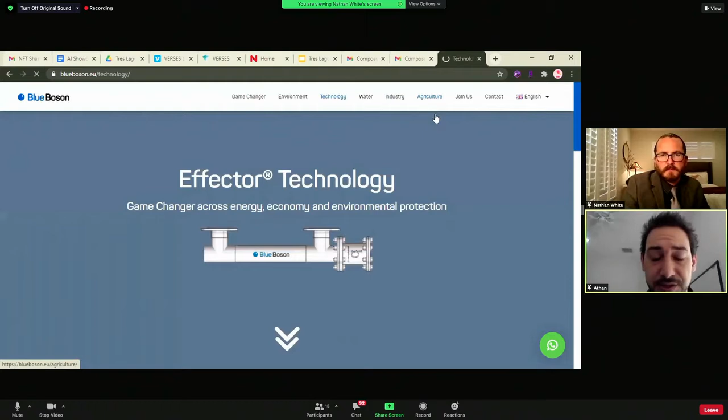In doing so, we're able to eliminate much of the typical infrastructure and cost. We're also able to scale this and implement it in decentralized areas, from indigenous communities to places that need help restoring riverways or treating areas, using a lot less energy to apply these methodologies.

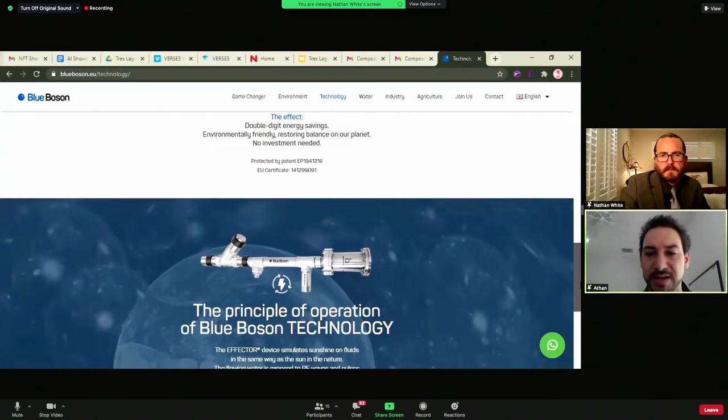Our excitement with this is that through our studies, we're able to change the evaporation temperature or the heat temperature that normally responds in a certain process. This also has implications for affecting the latent heat evaporation of water, potentially increasing rainfall in areas that need it.

We can reduce the thermal requirements typically required in a lot of water processes, and actually inhibit scaling, which is usually a problem today in desalination processes and similar applications. We can also reduce power requirements to achieve targeted results. It's exciting to be able to share these technologies and showcase things that are impactful for the environment.

We have part of our roundtable discussion that's been happening, with you, myself, your partners, Dr. Andrea Neal, who's on the call here too, and Rob Simpson. We've been going over some of this information, and maybe we can bring that up.

Rob, from your experience looking over this information, we're really excited about the scalability aspects—from a unit, shipping container size, all the way up to a massive field or array of units, or a manufacturing area. That's a really interesting part of this.

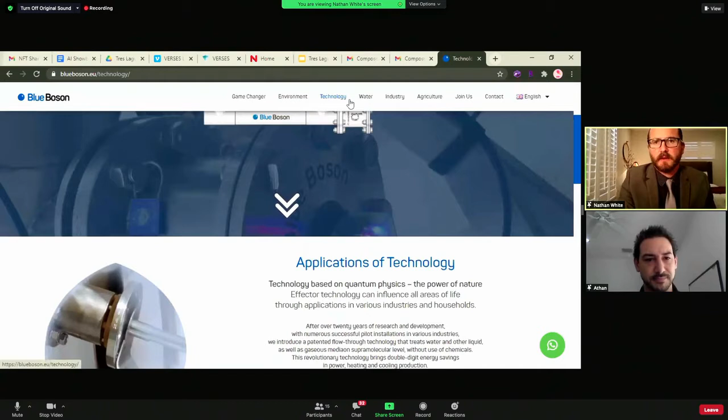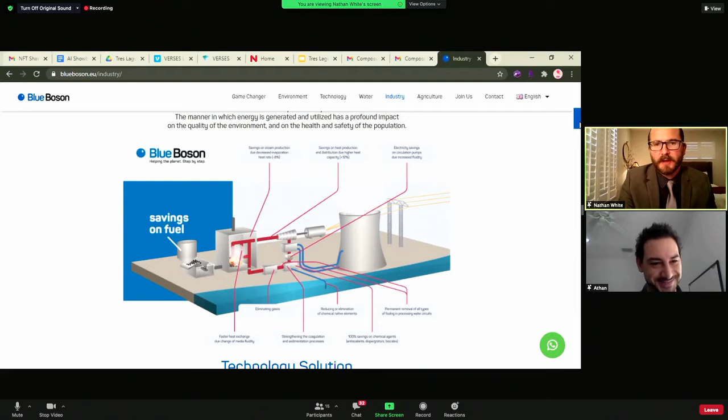That's really interesting. If you'd like, I could share my screen and go through one of our presentations, because of what you mentioned—we do quite a few different things with power plants and stuff like that. Sure, go ahead and do that.

Let me open this up. We're still having a little bit of trouble with the audio, so if you want to try and call in on your cell for the audio, that might be the best case. Okay, let me try that.

While he's working on that, do you mind if I reflect a little bit on my understanding of the technology? Absolutely, yeah, that's the open forum that we're here for.

Everyone here is familiar with a human being going within an magnetic resonance chamber in order to get imagery of the human body. Well, think about making that chamber a little smaller in diameter, and now you're running water through it. What this process, I believe, is thought to do is actually change the molecular structure of the water molecule.

So, hear me or not hear me? Some yes, some no, okay interesting. So what I can try to do is pull up my share screen here, let's see if this works. And pull up this one here. Whatever you're doing right now, we're getting the best audio of the session. Great, well that's wonderful then. So maybe it's just identified me as a person and it's allowing me to send it up. So let's see here, if I can open this up all the way. View full screen mode. All right, let's see.

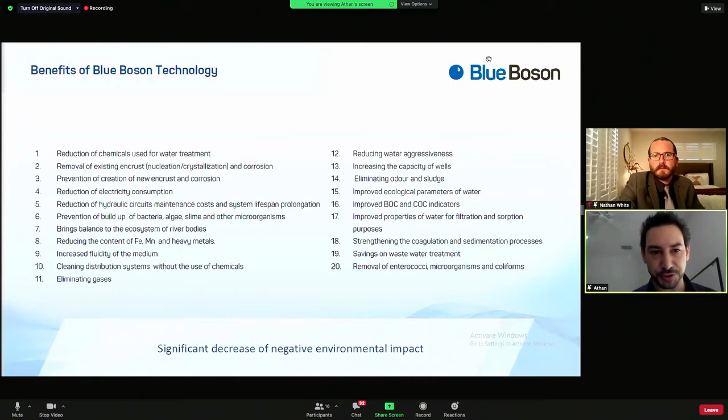Okay, so what we focus on is pretty much the ability to, I'm going to go through these a little faster here. We use resonant frequency, and we use low band frequencies, low energy applied to water. So when we're talking about how much water can be treated, it's usually depending on the size and the flow rate of the pipe, and not applied based on the amount of energy our technology needs.

Water has some very interesting characteristics where it's able to communicate through the crystalline structure. Water is a crystalline lattice matrix. It's capable of carrying, transceiving, receiving and storing weak information. But if you're able to change its structure, you're able to change the dynamics of how it transports materials within and is able to communicate. So this has to do with heat capacity, surface tension, evaporation, and the density of water.

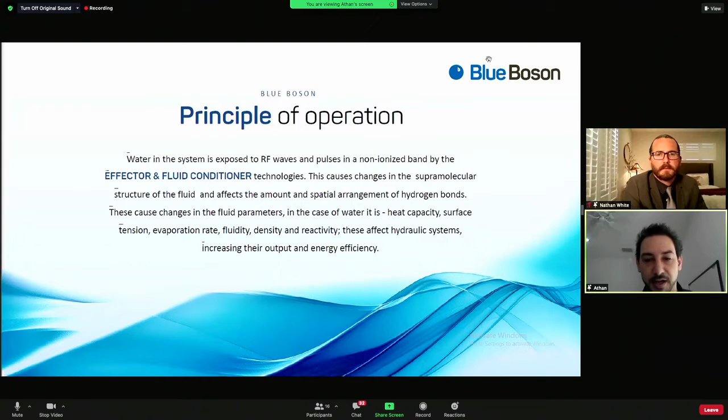We're able to precipitate and disseminate the elements a lot faster than you would in normal processes. This relates directly to filtering elements before they would go to membrane systems. So we're working with a couple groups right now within these processes to get the best efficiencies for membranes and for desalination, so we can systemize these together for this particular project.

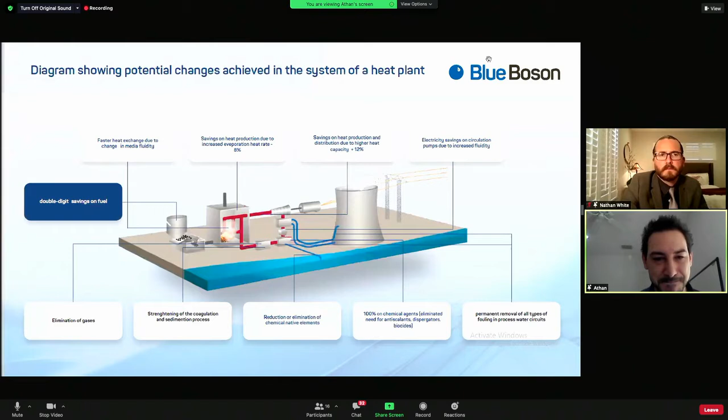I only hear myself, so I don't know if you guys can all still hear me or not. Hello? Yeah, we can hear you. Okay, perfect. Can you go back two slides? Yes, right there—evaporative heat.

That's latent heat of water. I believe you're looking at fresh water at 20 degrees Celsius. Normal evaporative or latent heat would be somewhere around 2,200 kilojoules per kilogram, and you're looking at 1,925 plus 11. Can you provide any further information?

I think it's also relative to the particular water on site and the environment, but with this particular study, that's the differences that they were able to get.

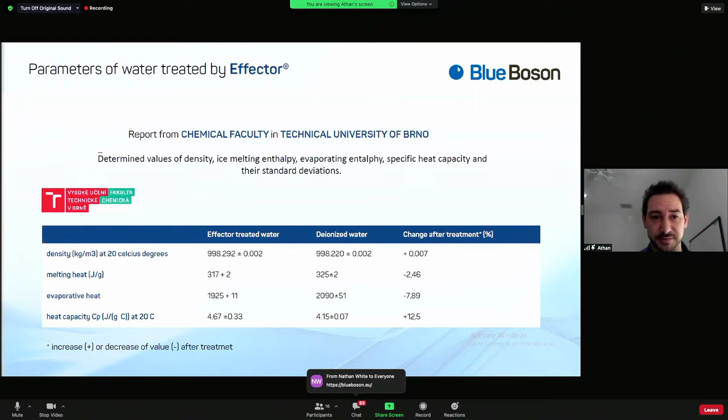I think there's a lot more that we have to realize with water—it's a lot less also just not only energy, but the dynamics of structure. Some things can't fully be measured, but there's also things you can measure and see as absolute results. For example, when we're producing ice or separating elements, you'll be able to see that in a practical sense, and that usually supersedes often what we're showing in some of these systems. Thank you.

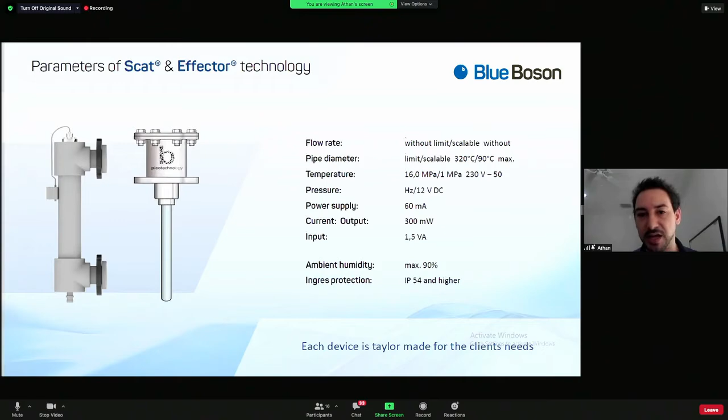So here's an example of the Scat and Effector. These are systems that we can employ directly into the water mains. What we're able to do, in effect—and you'll see the power supply—is it's not a system that takes a lot of energy. Same with some of these technologies I'm showing you here below.

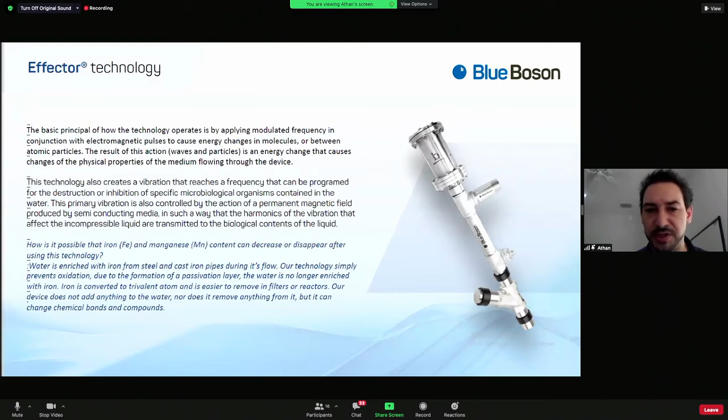These are systems that treat water directly in line in pipes, so we don't need chemicals. This creates an effect where you're changing the structure of water, but you're able to modify these structures to be more effective, not only through the processes, but to kill pathogens, to remove algae, and destabilize those molecules before they would conglomerate inside your water lines.

And that's a big issue, because long term, when you install infrastructure, the amount of power it takes to push water through a pipe all depends on if that pipe still has the same diameter it did three or four years ago. Otherwise, you have more and more resistance or damage to pumps, things like that.

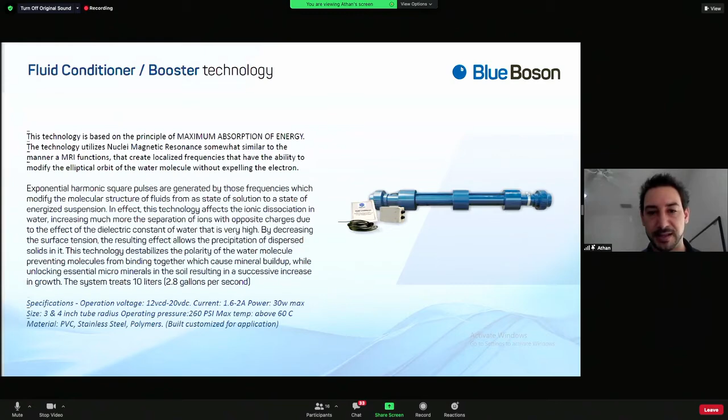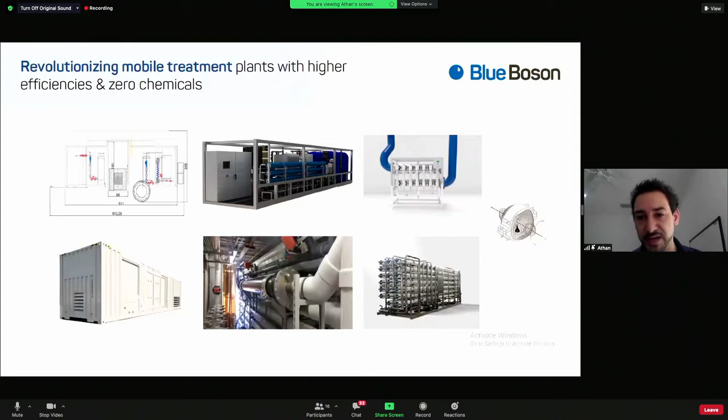So with these systems, we're able to put them together as containerized systems. We can deploy them along riverways. Some of these systems we're using directly with buildings.

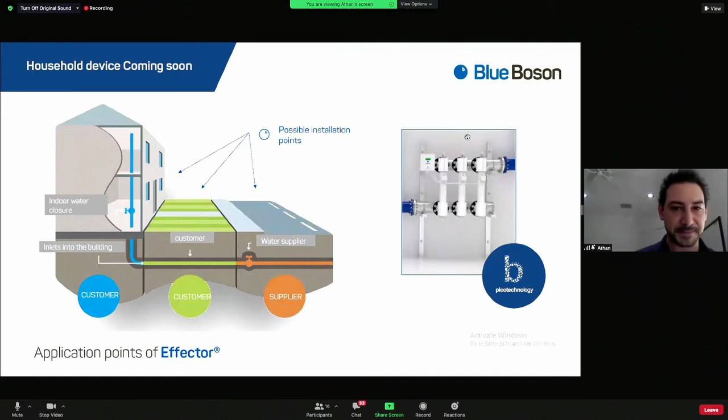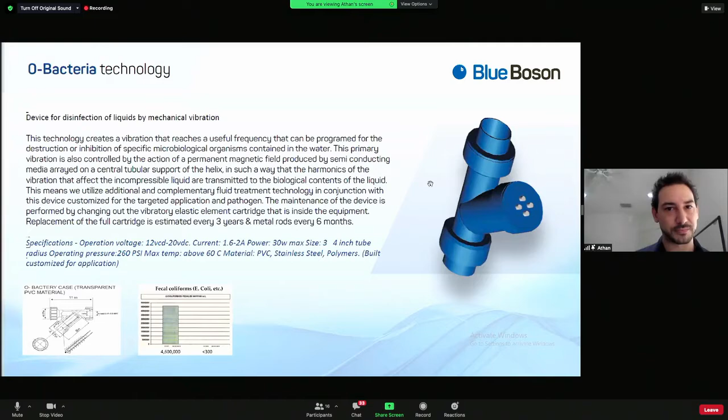Apologize here, I don't know how to turn this off. How do I get out of this? Okay. Let me see, I don't know if you guys here see me—I'm trying to get back to my main screen. Yep, you're good. I don't know if anyone has any questions so far.

No, I like what you have on the screen right here, a non-chemical disinfectant. That's our current water treatment system. It'd be great if, in Flint or some of these other places, you were able to install your systems right away, because the chemical approach is kind of our direct approach in most municipalities. It'd be great to install these at scale in a more structured scenario, starting at the federal government. I'm sure you already have many of these installed here in the United States—maybe you can talk about that a little bit.

Yes, we're doing more of mobile plants that are deployable. So I'm working with companies as well as some other commercial agricultural companies. Primarily, we have projects in Mexico and in Europe.

What's interesting about this technology is it's pass through—you can continuously flow water over these channels or through these areas, and the dynamics of what the technology provides is the way it eliminates the biological content that would be there. We can use frequency and inductance to treat anything from nanometers in size up to millimeters in size—it only depends on the bandwidth and the frequency that we apply.

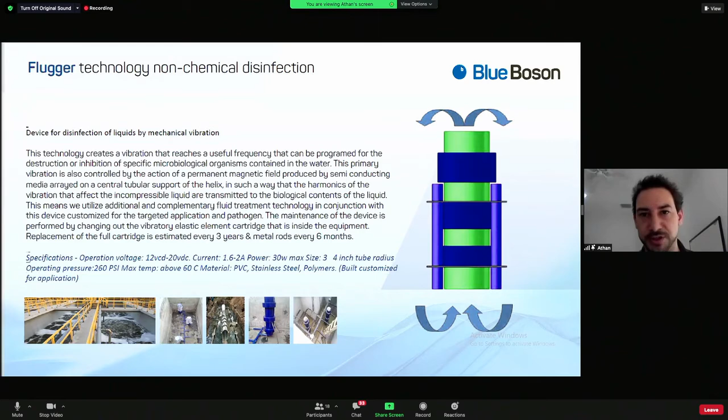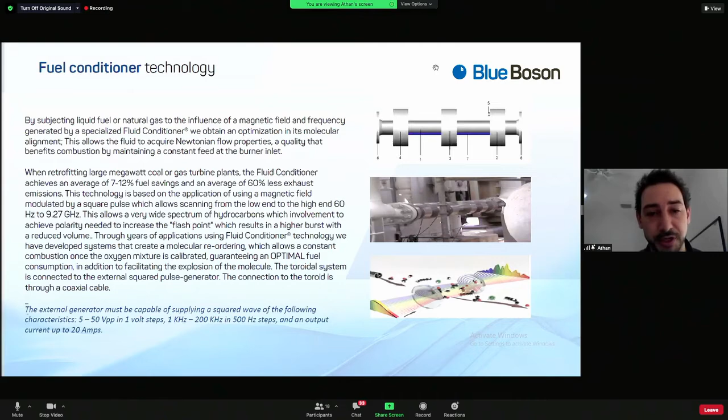The applications have also been used in hydrogen, where we use resonance and frequency to actually break some bonds of water. In doing so, we're able to produce almost 50% more energy efficiency and savings to produce hydrogen through that destabilization.

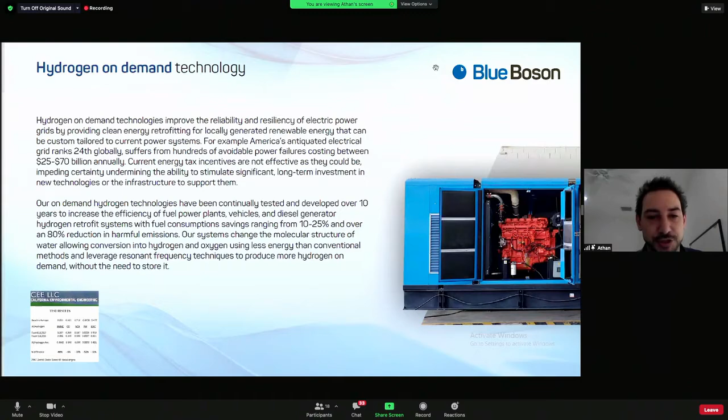This also relates to mining technology. We're able to separate certain elements a lot better. For example, we can pull out more iron, or we can pull out certain calcium and other elements like that.

Let's see, raise your hand thing here. Okay. So how we'll do this.

Let me step in real quick, Athan. We have Dan here. Dan, hopefully it's okay if we continue for a few more minutes. I want to try and give everybody a little bit of extra time, since we had a little bit of technical difficulty with the sound. Is that okay with you, Dan, if we push back by a few minutes? No, please continue. Oh, thank you.

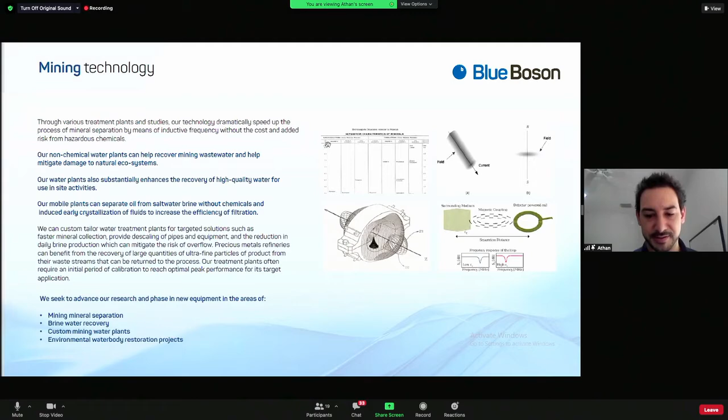Let's see here. Okay, so we've been applying these in quite a few different ways over the years. We're modularizing them. The benefits of what we're using and what we apply is lower costs.

Operating costs are less, and we can automate a lot of the processes. We're using about 70 to 80% less of the physical area, depending on the size of the plant, but we're using a lot less of the normal physical area space that would be required for water plants, container reservoirs, and so forth.

With this, we have a lot less maintenance required. You don't have the chemical components that create dangers in the work environment and in the environment. We're killing all the pathogens without hazardous chemicals such as chlorine. I think these are huge benefits and a big game changer for the industry, because we're able to speed up the processes while eliminating the chemicals.

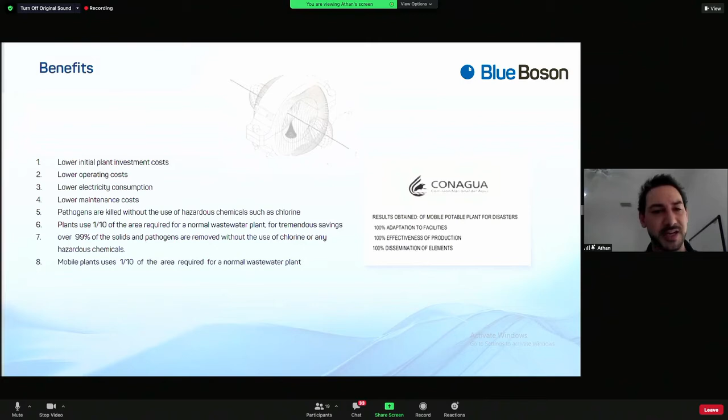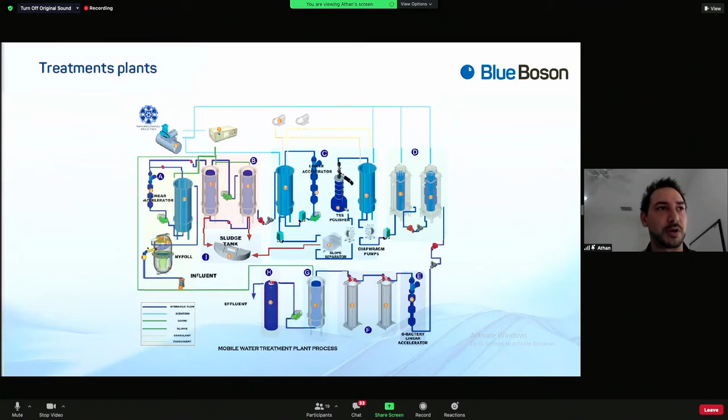Here are some examples of the systems within these wastewater plant processes that we use. We'll use inductance and frequency, and we modify the initial structure as it goes through different temperatures and processes. We're able to target the result and at the end have anything from slaughterhouse water to raw sewage, and bring it down to something that can be reprocessed or used for plants and crops and so forth.

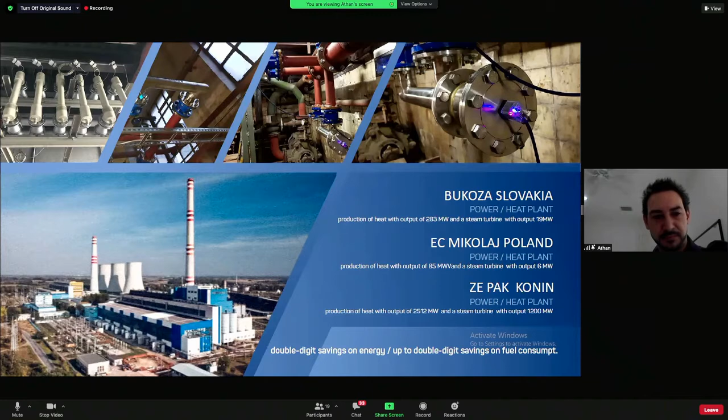Let me jump in on that, because those are some of the direct site-specific conditions. We want to talk about technology as a whole, but site specificity is really important too, not only in Mexicali, but there's a cow farm on the east shore of the Salton Sea. This could be a system that could be deployed, and it could be part of the New River and Alamo River too.

Yeah, absolutely, let me see if I can show this. Here's a good example of what we're doing. This is just water, there's been no chemicals applied. If you look at the heat exchangers in these pictures, you'll see that one's absolutely clean, like it's brand new, and that's not something you typically get with chemical-based technology.

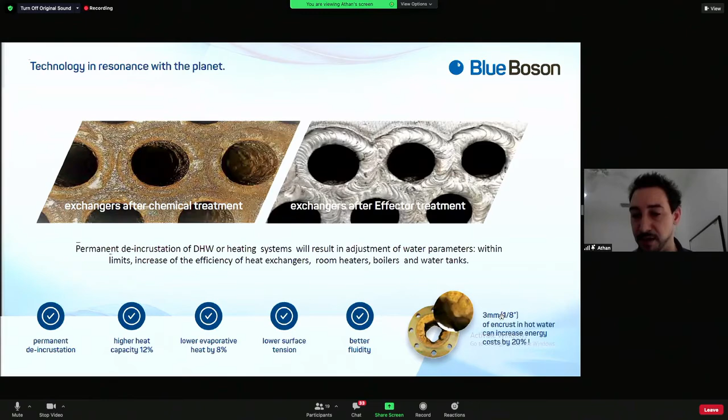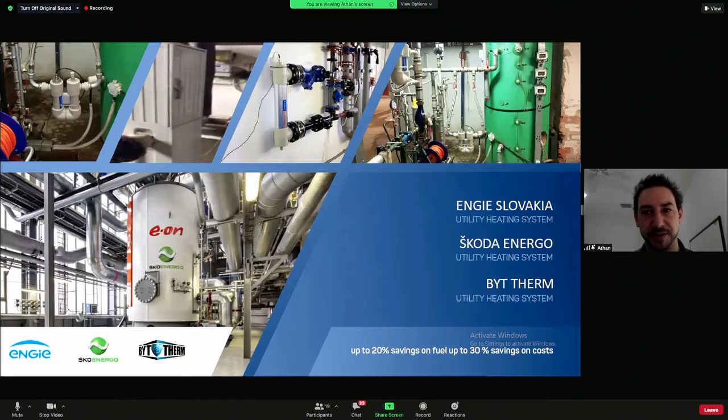At the bottom, you see the difference with the encrustments, and this would be one of the biggest concerns we'd have, because in the Salton Sea there's a lot of buildup, a lot of magnesium, and different compounds that are sticky inside of pipes. Here are a couple of our different installations we've done through the years, and the benefits that these customers and different communities have been able to see.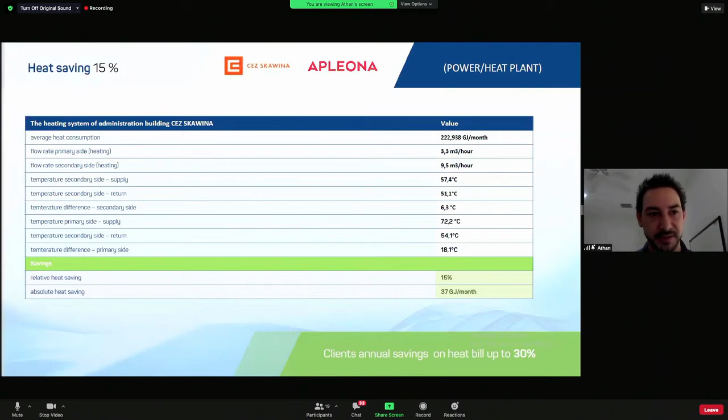Athan, this is Roger Arnold. Can you hear me? Yeah. Yes, I can hear you fine.

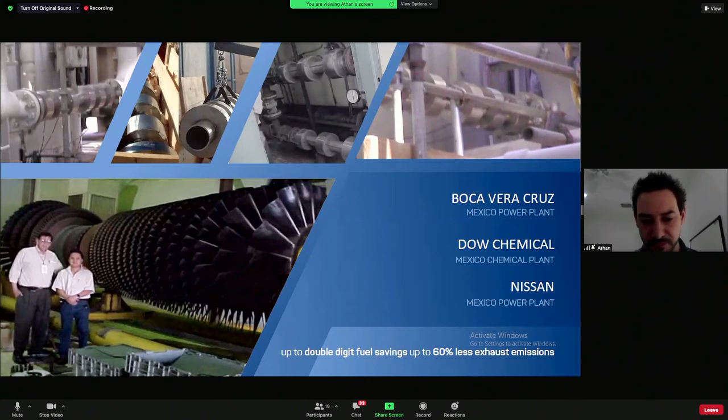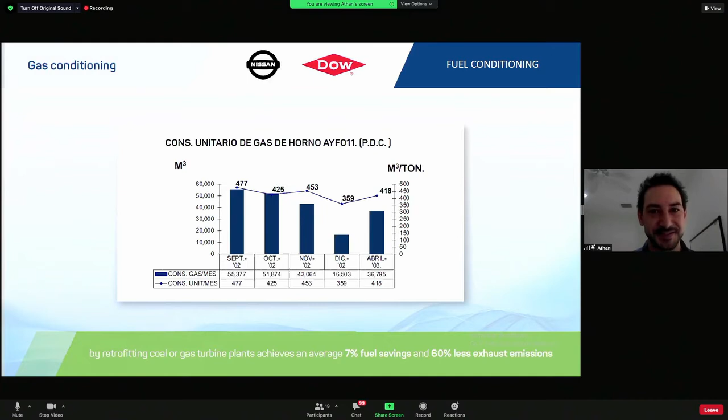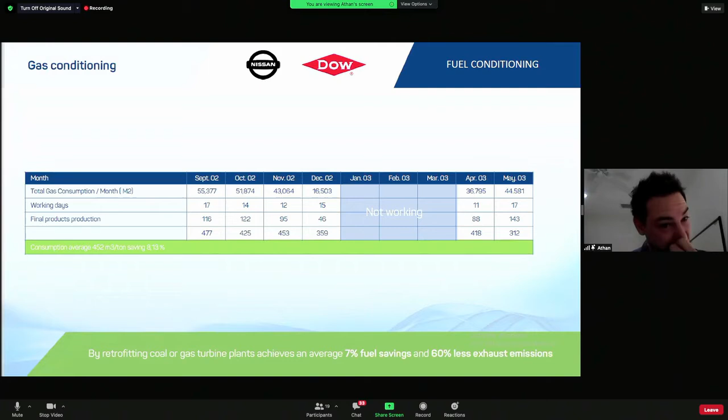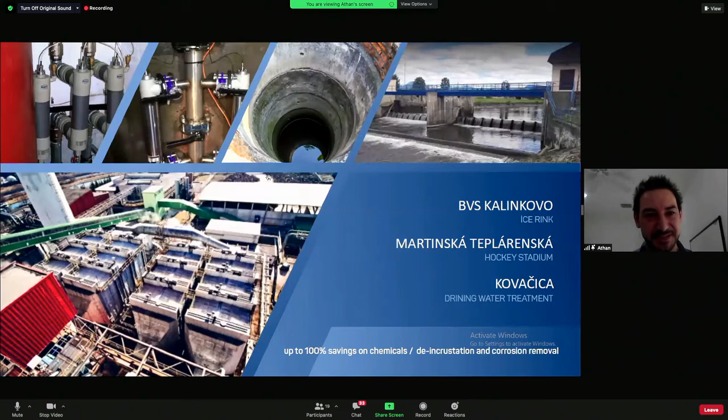I'm sure you're well aware - well, let me say I've been retired for some years, but I do have background in physics and chemistry. What you're talking about, as I'm sure you're aware, flies very much in the face of conventional physics and chemistry. I'm wondering if this is something that was developed from some theoretical understanding or basis, or whether it was something that was discovered, and if there are technical papers that expound on the theory of how all this could be possible.

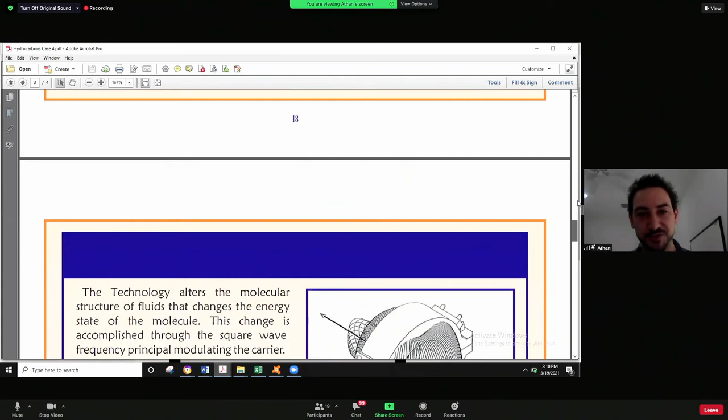Yeah, very great question. Thank you. I appreciate that. Let me see if I can't - I'm going to go to one more page, and this one will be helpful. This was the original ones, and I'm going to move up to who started this.

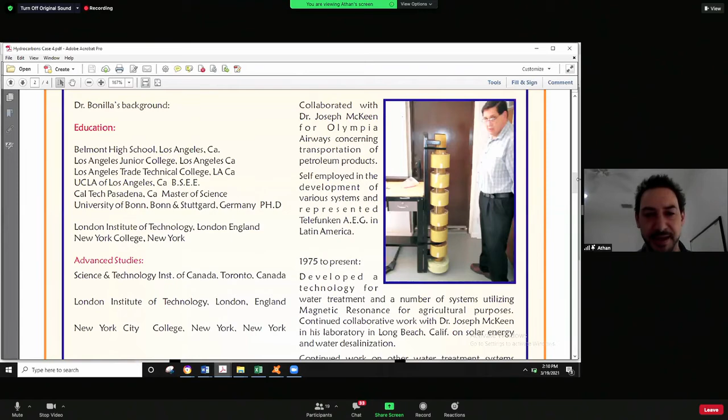And this is Dr. Bonilla. He passed away in late 2016. He was a mentor of mine and just a great, amazing person. He studied at University of Stuttgart and in LA, and he was an Air Force pilot.

Let me see if I can zoom out a little bit here so you can get a view, because this is kind of one of the original inventors of where all this started. And he's a nuclear physicist who spent the majority of his life from the Air Force to developing HAARP and NORAD programs. He worked in Antarctica.

He worked with some people that worked with part of the Bell Project, as well as under the wing of some ex-Germans who moved to Mexico City when he was a boy, that told him that he needed to start learning frequency, electromagnetism, and what energy might be. And it put him on a pursuit throughout his life to, through radio and through frequency, understand a lot of the inner workings of nature.

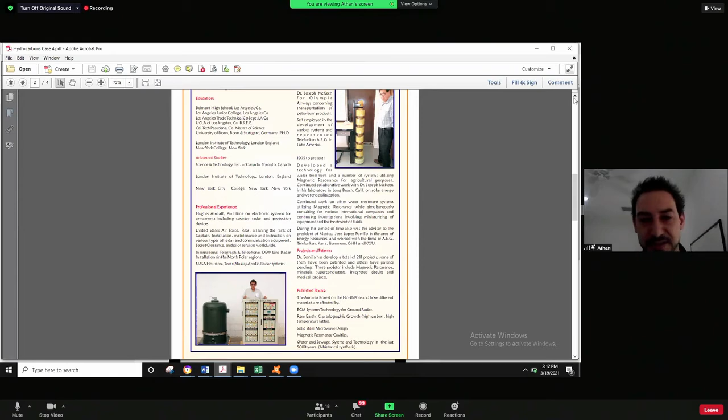He used to keep dialogues and books of the resonant frequency of a spider mite to a table bug, developing different types of projects that were based around plants, and creating example perimeters where a bird would be deterred to fly through, and he developed these systems for airports, for example.

And realizing this and how these technologies were used, he created systems the past 20 years of his life that could be applied this way, using the understanding of nature, the principles of physics and frequency, and some of the things that we don't see, cross-experimenting those together to get a conjugate, to figure out what the application is, the high, your low, and your middle of your X, your Y, and your Z, how to properly apply these transmissions, how to properly use these within an environment.

So we developed things from rife machines that can sterilize the soil and kill nematodes in the soil, to creating screens that can eliminate biological contents, to actually reversing that and making contents grow more. So everything has a polarity. Everything has the proton spin - it has a lot of effect on the life of everything around us.

And when we really start to understand, because this is really bigger than us, I think that a lot of conventional physics is also a deterrent. There's a difference between practical application and political science. And I think a lot of our science today is political science, and it's not backed by long-term research, long-term studies. There's a great oversight in how we interact with our environment.

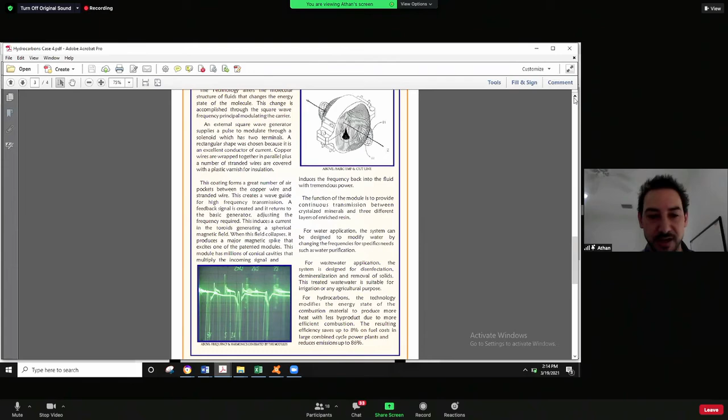So to me, and thank you for the time in explaining this, we've been able to develop these different types of technologies as different superconductors, or ways that create new dynamics within different processes that reach these targeted effects. And if you'd like to learn a little bit more, I can send you some information.

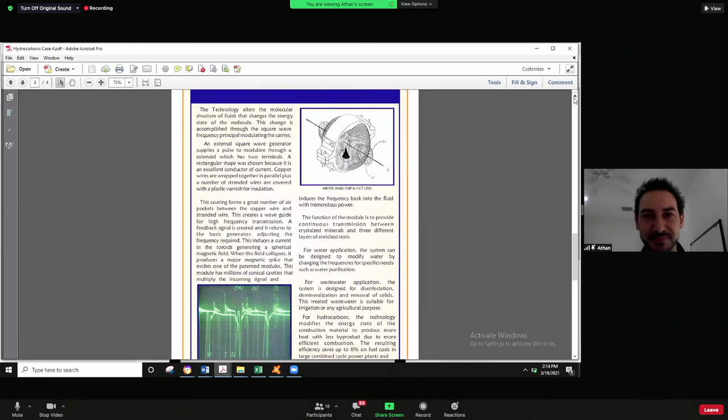Thank you so much, Athan. And that's a great question. I mean, what we're talking about here, every particular technology and company that we've highlighted over the last couple of days, goes in the face of established politics, science, and engineering approaches.

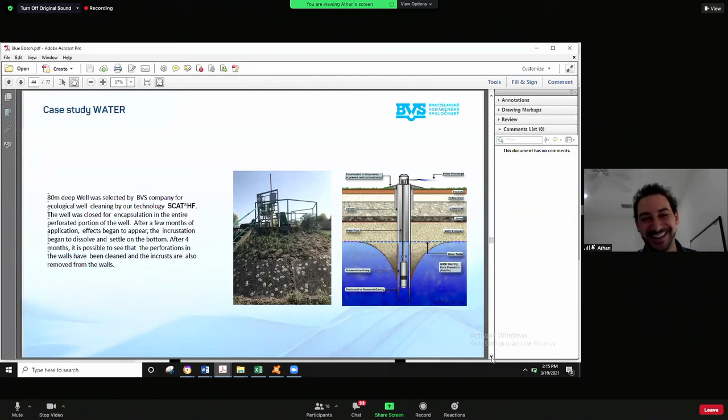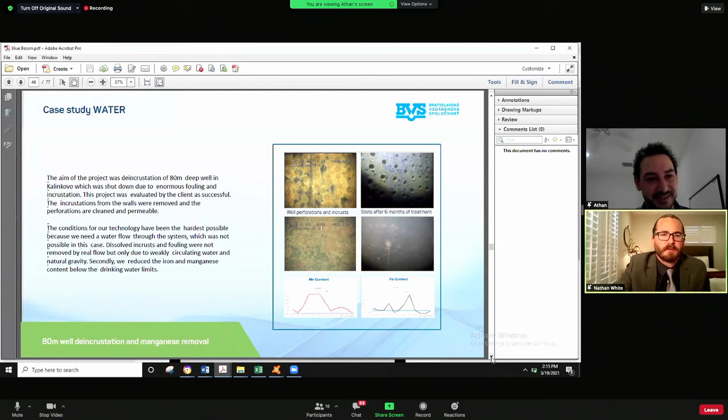And that's what brings humanity to the next step, when we all collectively understand there's a better way of doing it, as long as you've tested those ideas. What Athan is talking about is great, and I think Andrea wanted to say something real quick too. Andrea, can you hear me okay?

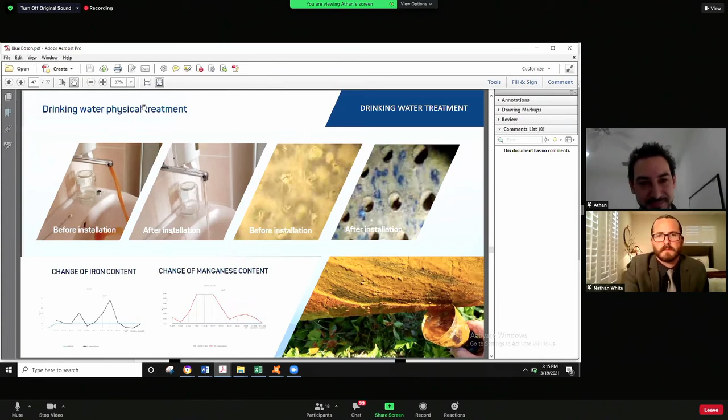Over the last decade, there's been a number of scientific publications talking about conformation of water and utilizing different frequencies to change that conformational form. There's even been papers on natural occurrences of this, like from deep sea thermal vents, where they've seen phases of water that look like water snot, as they describe it. The trick is how you maintain that conformational change long enough to create the interactions we're seeing, because in many ways water snaps back into its original conformation after whatever disrupted it changes.

So it's a great question, and the science is evolving. There are a lot of physicists and water scientists working on these issues right now, looking at both laboratory-based standards and what's happening in nature. But what Athan is talking about, what they've shown and done, is industrial applied, proven not only from a desktop standpoint but also as an industrial applied application.

Absolutely, thank you Andrea, great point. Yeah, we're not experimentation, we're an industrial application. We're actually in the middle of bringing more capital to systemize a lot of our water plants for small communities, creating systems we can deploy with other companies and people who want to commercialize or systemize these in communities around the world. We can help become that provider.

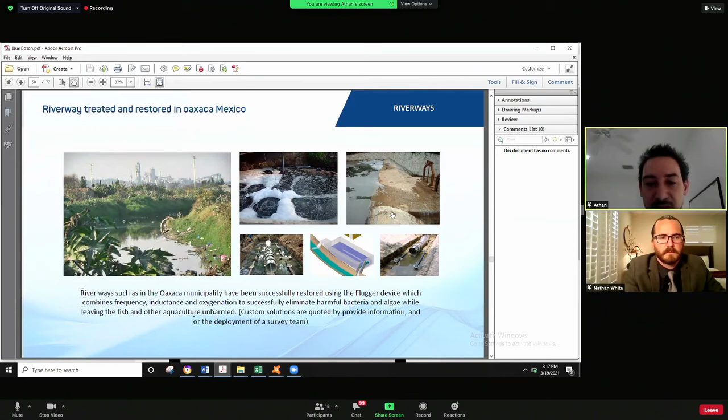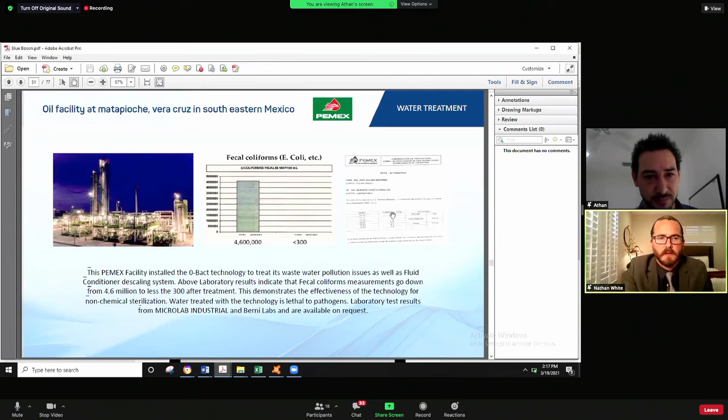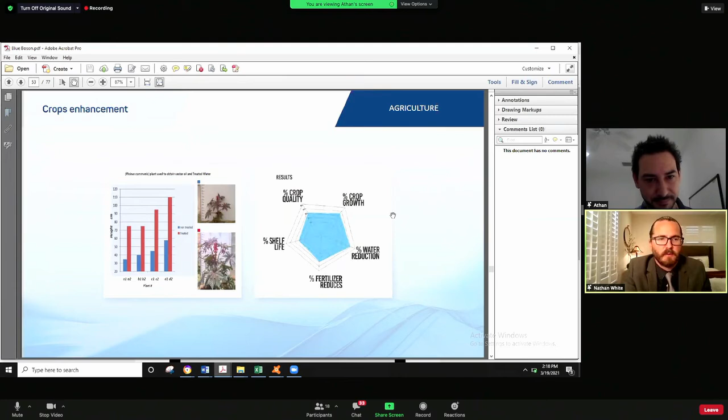We're excited to try and deploy this at Desert Shores, testing one of the miniature shipping container units there, and we're in the process of developing that coordination now. Relative to that, one of the tests was projects we've done with tomato crops and other crops in Baja, Mexico, where we've successfully irrigated them with water that was brackish.

Absolutely, so that's pretty much the summary there. I definitely invite anyone to ask any questions—we're looking to collaborate on this and make it as effective as possible, and we want everyone to help contribute to the Laguna Salada and Salton Sea project.